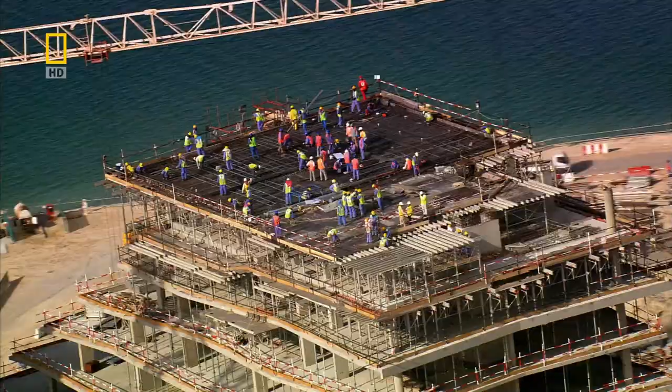Abu Dhabi, the richest city on the planet. It wants to join the City Super League and is undertaking an incredible transformation, building this extraordinary skyscraper, Aldar HQ. Nothing like it has ever been attempted. It'll be a race against the clock. Will this megastructure push even Abu Dhabi to the limit?

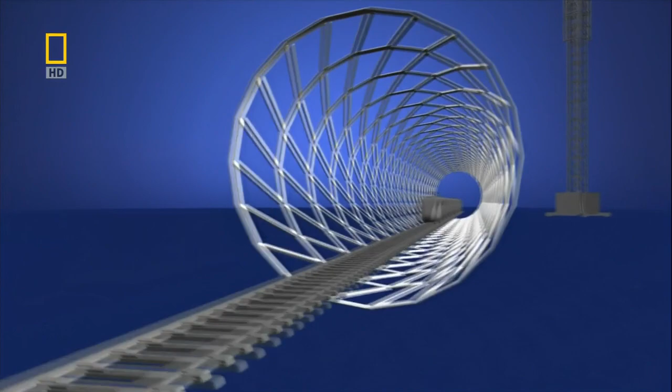Abu Dhabi is in the midst of a construction boom. It's the largest of 7 sheikhdoms known as the United Arab Emirates. Its capital, also called Abu Dhabi, is the richest city on earth. Its ruler, Sheikh Khalifa, has a cool $875 billion in the bank and an audacious spending strategy to match. He wants to transform the skyline and compete with the international elite of London, New York, and Hong Kong.

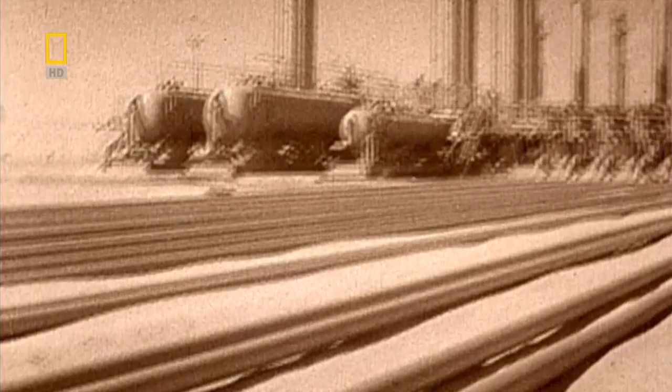But this is not the first time the Emirate has stood at the crossroads. Just decades ago, Abu Dhabi was a desert backwater, until the discovery of oil in 1958 brought unimaginable riches to its ruler, Sheikh Zayed. As the petrodollars flowed in, he converted the shell houses into high-rise, and the traditional way of life was swept away.

Today, Abu Dhabi is a thriving metropolis, sitting atop the world's 5th largest oil reserve. But black gold alone cannot put this city in the Super League. To do that, Sheikh Khalifa must lure big business and tourist dollars. Abu Dhabi must expand to thrive.

To put Abu Dhabi on the world map, fledgling property developers Aldar plan a whole new micro-city, Raha Beach. It's an ambitious proposal. At 11 kilometers long and almost a kilometer wide, this city on the sea will be the biggest project ever attempted in Abu Dhabi's history. Mohammed Al Mubarak is in charge of delivering this audacious development. The vision of their highnesses and the vision of Aldar was to create this almost mini city where people can live, study, play, and work in one destination.

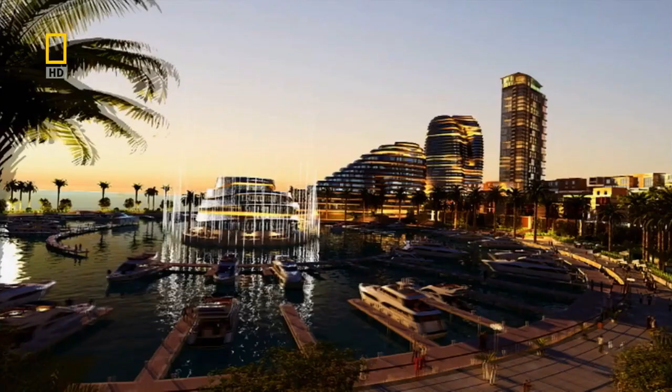Al Mubarak must attract investors if Al Raha Beach is to succeed. So to launch the project, he commissions a signature skyscraper. Creating an iconic structure on Raha Beach was of vast importance in basically putting Raha Beach on the world map. Al Mubarak sets Lebanese architect Marwan Zgheib the task of designing an icon that raises the stakes even higher. The building will become Aldar's headquarters in the heart of their colossal development.

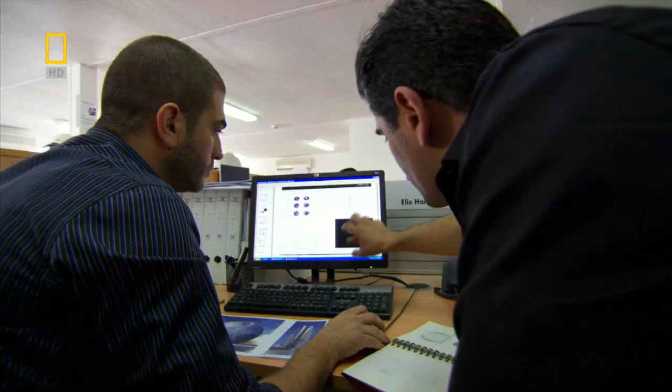But creating something new in a land where the iconic is the everyday won't be easy. Neighboring Emirate Dubai has taken center stage with a number of headline-hitting projects. The world's tallest skyscraper, Burj Khalifa, the Palm, and the World, and the emblematic Burj Al Arab. To stand out from the crowd, Zgheib knows he must redefine the extraordinary. Simple can be powerful sometimes, especially in architecture. You can see it since the pyramids of Egypt. Most of the iconic buildings are very simple buildings.

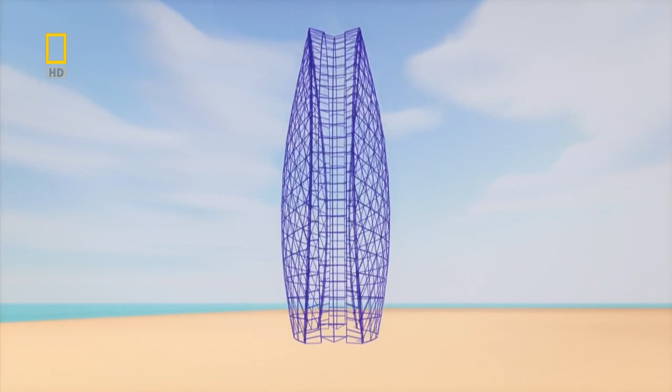But it isn't until Zgheib is relaxing on a plane that he has a brainwave. I couldn't sleep, so it was a moment of relaxation, you know. And then the idea came, simply. So I took a pen and I drew it on a sketchbook. The design is simple but daring. A round skyscraper taller than the Statue of Liberty, with a curved glass skin covering the area of 4 football fields. To be honest with you, the moment I imagined it, I knew it was a winning concept. I knew it was something different.

In fact, the design is so unusual, Al Mubarak initially doesn't know how to react. When I first looked at the MZ design, I was a bit confused in the beginning, to be honest with you. I felt like I was looking at a comic. I felt that this was a flying saucer and basically it landed on Raha Beach. And I just kept on staring at it for like another 15 minutes. And after 15 minutes, I just fell in love with it.

Zgheib's design is inspired by nature. 2 giant circular curved walls of glass mirror an open clamshell. Architecture is nothing but imitation of nature. At the beginning, the idea was so geometrical, very pure. It's like a seashell. The seashell has deep meaning for Abu Dhabi with its seafaring heritage.

But a circular design poses a problem. Just like a coin that stands on its edge, it risks being unstable. The circle must be balanced. So Zgheib turns to some very old-school geometry. The real challenge of the circular facade was to find the 2 points where the building should pose on the ground. And for that, I had to go back to one of the oldest rules in architecture, proportion. When you have a circle, you can divide it into a pentagram.

And that pentagram, in fact, is a representation of the cosmic body of the human being. So you can put a man in that pentagram, the man and the universe. So the pentagram will define the 2 points of the circle where the facade will lay on the ground. And this will create the perfect balance.

It was the same thinking that led 16th century philosopher Heinrich Agrippa to draw man as a pentagram inside a circle, and has helped architects to proportion buildings for centuries. But it's one thing to sketch a circular skyscraper and another to bring it to life. There is no precedent. A building like this has never been attempted before. Zgheib must find out if his design can actually be built.

We knew from the first moment that the engineering of that building is not going to be a simple traditional thing. But it's not the skyscraper itself that poses the first major challenge. It's the proposed site. They wanted to show me the site, but all you can see was the sea, nothing but the waters. Unbelievably, the solid ground required for Aldar HQ does not yet exist. The desired location is 700 meters out in the Persian Gulf and 8 meters underwater.

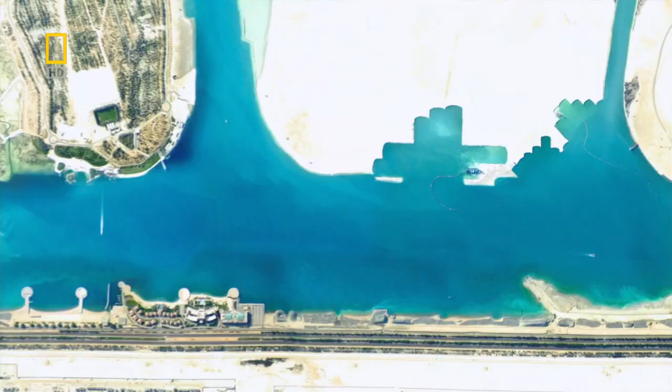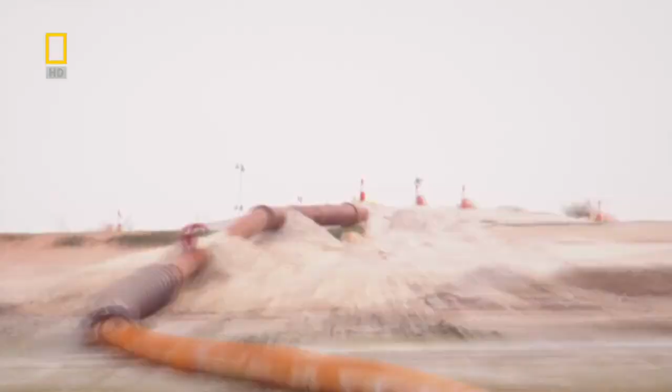These are no ordinary dredgers. It takes an enormous claw layered with 48 reinforced steel teeth to slice through the hardened sand. The sand is pumped through a floating pipe to the construction site. Here, excavators toil 24 hours a day to flatten the virgin ground. After 8 months, the land for Aldar HQ is fully formed, and with this, the first major problem overcome.

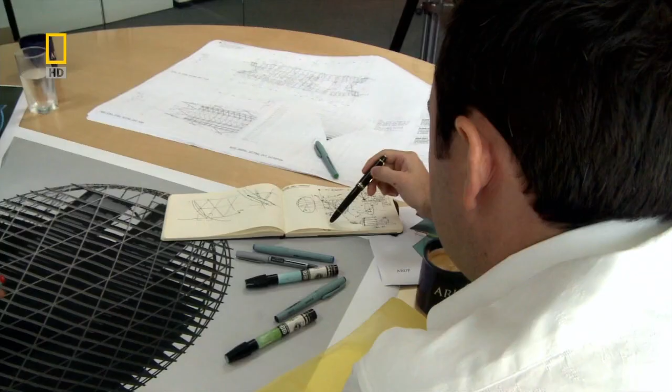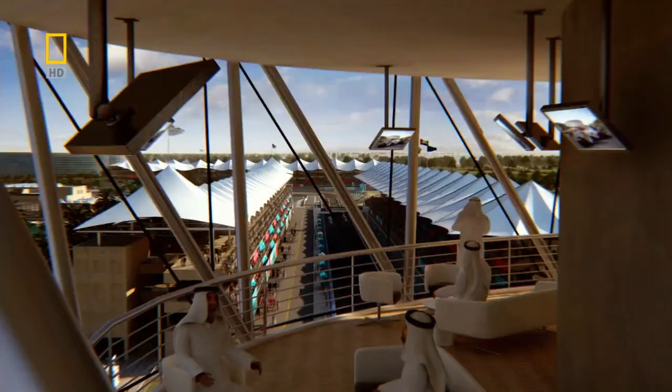Aldar want their skyscraper completed by an astonishing deadline. In just 30 months' time, the eyes of the world will be on Abu Dhabi when it hosts its first Formula One Grand Prix. The racetrack will be on its own designated island, complete with hotels and theme parks. And Aldar are building the lot. The international press and tens of thousands of visitors will descend on the city. It's the ideal opportunity for Aldar to showcase their new HQ. But to stand any chance of meeting this target, the team will have to pull out all the stops.

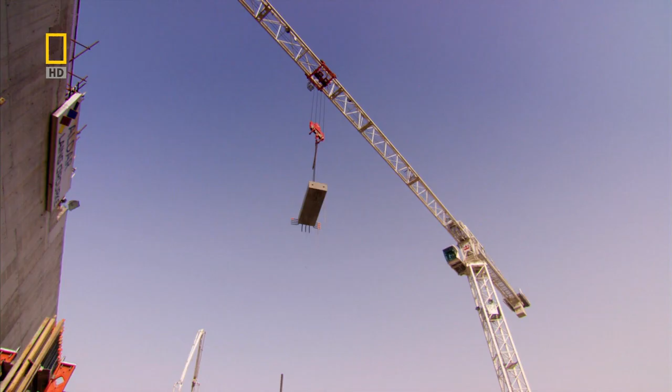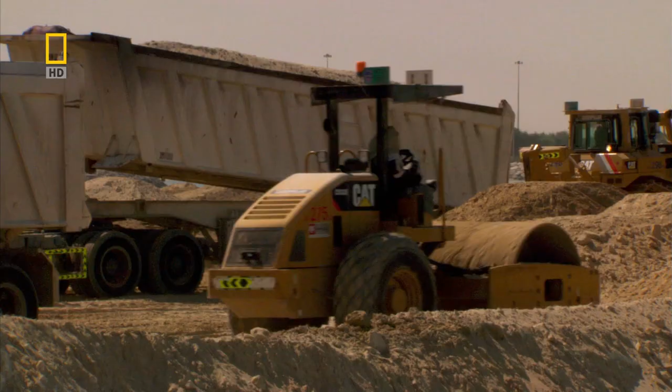Normally, blueprints are complete before construction begins. But Aldar HQ's deadline means this is impossible. Given the programme challenges with this project, the only solution was to overlap the design with the construction. It's the only way the team can design and build a radical skyscraper in just 30 months. With the clock ticking, the ground is prepared for the foundations. They will carry the loads of Aldar HQ into the ground.

But there's a problem. Working on blueprints one step ahead of construction could be risky. The speed at which the construction had to be undertaken meant we had to get the foundations in before we'd fully resolved what goes on above. Even though nothing like Aldar HQ has been built before, the engineers must take a leap of faith and start laying the foundations without a full set of plans. It put tremendous pressure on the team. Problems can't remain problems for long. We don't have the luxury of time to sit around and contemplate what the solutions might be.

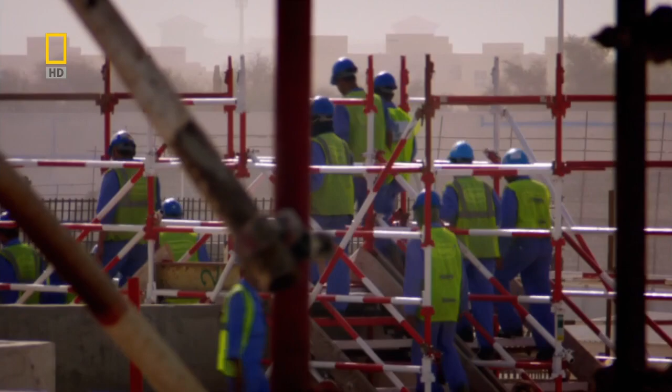Just 1 month after design has started on Abu Dhabi's round skyscraper, the construction team arrive on site to begin foundation works. For construction manager Miles O'Sullivan, the schedule is a shock. With the design not complete and being told you're going to pile in 1 month, almost crazy. But it's not just the first deadline O'Sullivan has to worry about. Aldar HQ's round curved shape presents an enormous sail-like area when wind strikes. Wind tunnel tests must be done to prove the foundations can take the strain. But the results won't be back until work has already started.

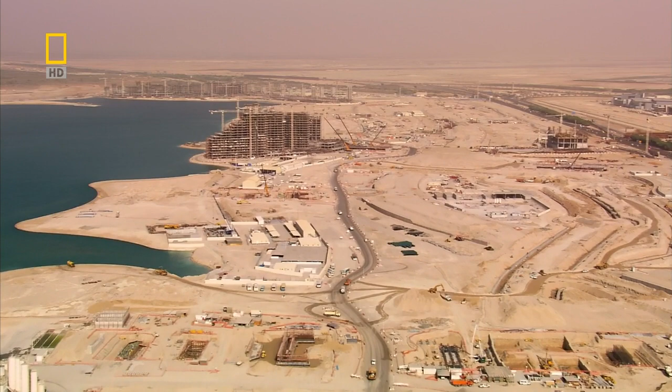Abu Dhabi is regularly hit by high-pressure winds that sweep in from the Persian Gulf. But building Aldar HQ so close to the sea will put the foundations under another kind of pressure. Digging for Aldar HQ is very similar to digging here in the sand. What you get as you dig down is you'll get to see the groundwater starting to surge through the sand. And in fact, it's that groundwater that we see start coming through the sand here that's creating the pressure and obviously creating the issues for us when we do the construction.

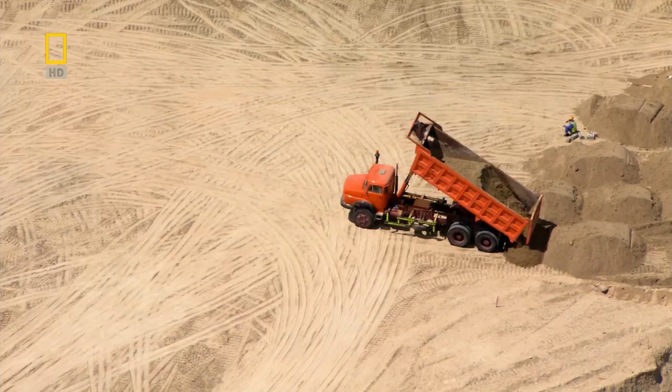The upward pressure of the water and the loose sand pose a problem for foundation construction. Before excavation can begin, the team must build a solid barrier called a diaphragm wall or D-wall. It's a concrete barricade formed of interlocking panels which socket into the bedrock and reach 16 meters below the surface. The D-wall holds back the loose sand and the surging seawater, ensuring the ground inside the barrier can be removed.

These areas here, what are these? The D-wall must be built before the foundations can be laid. But with the blueprint above ground a work in progress, the team can only hope that over-engineering the foundations will make them strong enough.

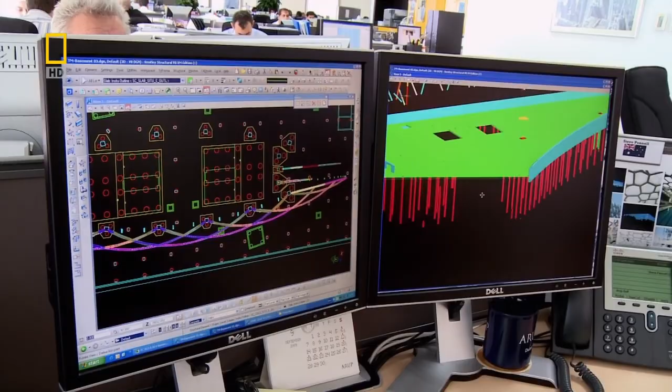The design calls for about 400 concrete piles that work in two ways. Half of the piles rely on friction with the ground to secure the structure to the rock and sand below, whilst the remaining piles drive deeper into the rock to dissipate the building's immense loads into the ground. On site, D-wall construction begins. It's the same process ongoing at this Abu Dhabi construction site.

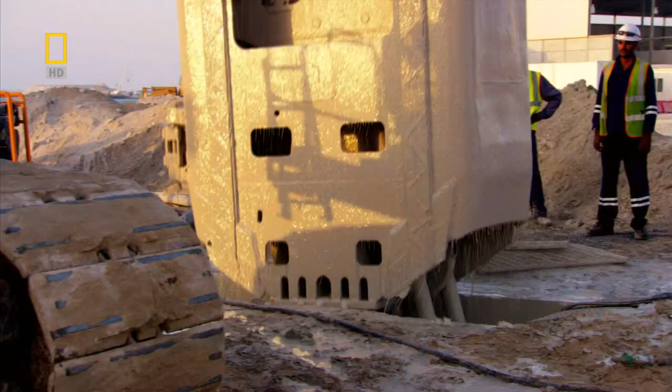Until recently, Raha Beach was just a vision for Aldar's Mohammed Al-Mubarak, but the dream is slowly emerging from the sea. Seeing that land come up, seeing the amount of work and the amount of staff we had on the ground to make sure that was going to be done, that was like watching Rome being built.

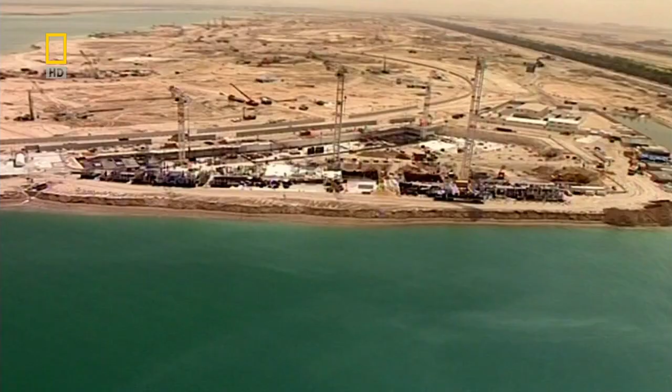The D-wall and concrete piles create a firm foundation upon which to build Aldar HQ. But the force of the sea pushing up through the sand still poses a threat to the skyscraper. A great way of demonstrating the problems we faced at Aldar HQ with the groundwater is in imagining that this bottle here is Aldar HQ. And as I push the bottle down, you see forces are exerted on my hand. And in fact, that's the groundwater trying to push the building out, trying to push Aldar HQ out of the building site.

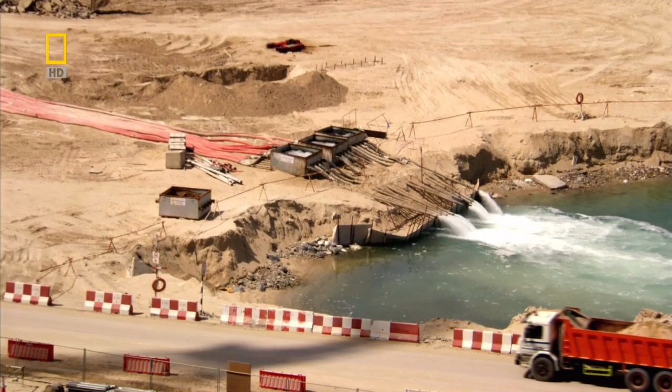To keep the site dry during construction, water is sucked out of the sand and pumped out to sea. But that's only a short-term solution. To protect this skyscraper in the long term, the team need an extra defense. It's a giant slab of concrete called a raft. It creates a barrier against surging water, stops the piles from punching up through the building, and acts like a snowshoe to evenly distribute Aldar HQ's 59,000-ton weight into the ground.

Raft construction for Aldar HQ is 12,000 cubic metres of concrete, which is a 30,000-ton structure. It's a huge element. With 2,000 truckloads of concrete to pour, it's a job that continues into the night.

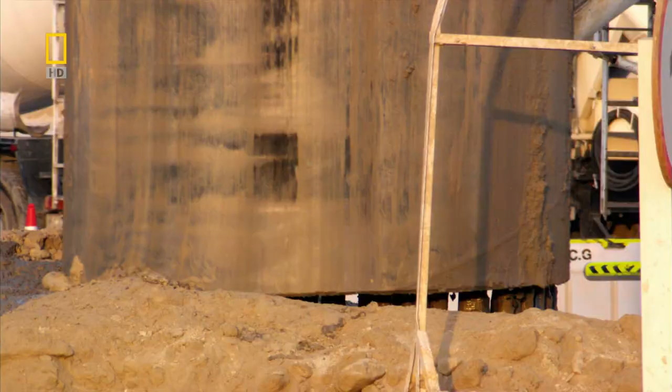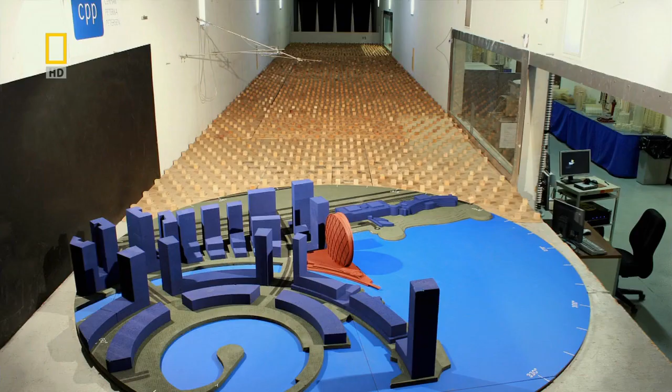But engineers are just getting to grips with the severe forces that will affect the piles. The unique shape of the skyscraper will capture wind like the sail of a yacht. There are no guarantees the foundations will be strong enough to cope with the loads. The advanced construction works had to commence so quickly that we didn't have time to do the wind tunnel test. It was important that we did one, primarily because this is a unique shaped building. Gibbons calls upon wind engineer Roy Denoon in Colorado, USA. He puts a scale model of the HQ through its paces in his high-tech wind tunnel.

Right at the start, Craig Gibbons actually called me and said, "We've got something really unusual coming up. Can you take a look at it and give us your first best guess of what the wind loads might be? Give us some guidance on how to get to some loads for the foundations, because this is running on such a fast-track schedule." Knowing that Gibbons is already building the foundations, Denoon wastes no time in firing up the fans. If the tests reveal the wind loads are higher than predicted, the foundations already in the ground may have to be redesigned. To be putting in the foundations before we could finish the wind tunnel testing, that always gives us a little bit of cause for concern.

Denoon is right to be worried. He knows how high-altitude wind impacts on very tall rectangular skyscrapers. But Aldar HQ's lower height means another type of wind is the threat. When we look at the really extreme wind speeds in the Middle East and in this region, we find that the highest, what we call gust wind speeds, the short events, are caused by thunderstorms. Abu Dhabi may appear sun-soaked, but during the spring, the intense sun heats the moist air, causing spectacular thunderstorms. Wind speeds can escalate up to 137 kilometers per hour. The key issue with thunderstorms in this region is that they give the absolute highest gust wind speeds.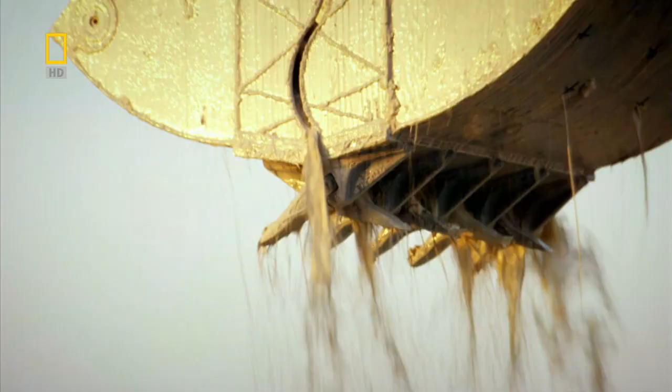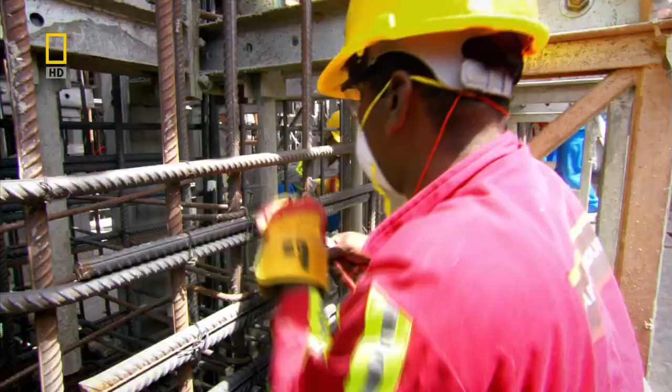Now the structure needs a super strong backbone or core. But again, conventional building won't fly with this design. For Aldar HQ, one core wasn't enough. We needed two cores, in fact, to take all the loads down into the structure. Aldar HQ needs two concrete cores for extra stability. The twin spines rise a full 125 meters from the concrete slab to level 23. Reinforced with 6,500 tons of steel, these cores will transfer the loads into the piles. But to channel these forces safely, the concrete must be cast without any flaws.

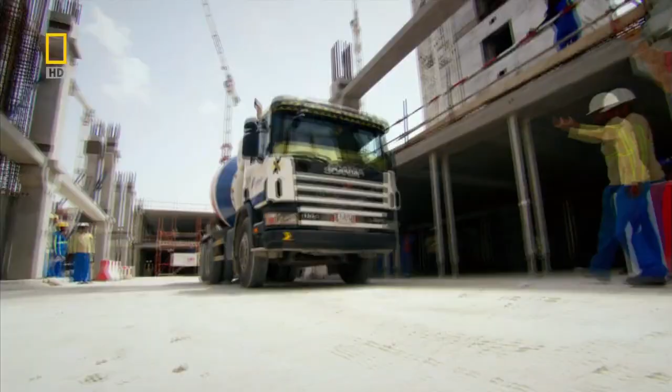They need a way to build the cores as two single pieces of concrete. The answer? To slip form. It's a clever way to build big concrete towers. Liquid concrete is poured into a giant mold, which forms the shape of the structure. The mold slowly climbs up the core as it's cast, forming a single concrete tower without any joins. Seamless concrete will ensure the HQ's cores are strong. But these 125-meter backbones must be built in only 6 months.

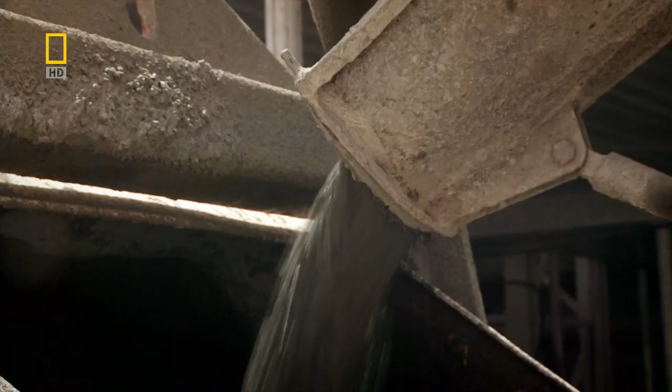It's the same process ongoing at this Abu Dhabi construction site, led by the Aldar HQ team. We are calculating how much per hour we need to climb, and then how much concrete we need to place in every hour. Slip form is fast, but on this schedule it's not fast enough. O'Sullivan has a trick up his sleeve to speed up construction. We set a challenge to both cores, who could get up there first. More, get up. The teams battle to reach each level before the other.

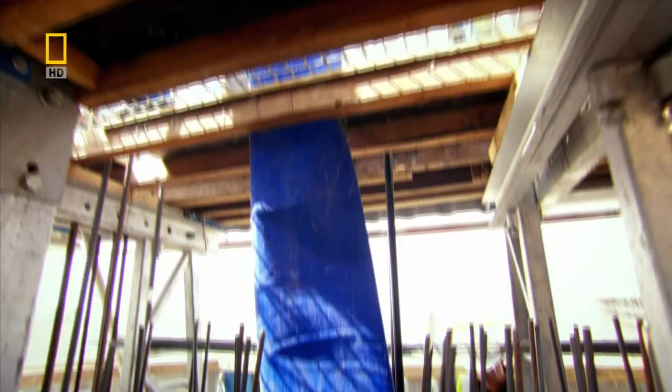The cores grow meter by meter under a constant cycle. The concrete is released and poured around the steel reinforcement. Hydraulics anchored to the structure raise the mold or shutter so that the next layer of concrete can be poured. And manpower is a key focus because slip forms are very labour intensive. You need to make sure that the guys are on deck, they're there at the right time, they're doing the right works. 4 months into core construction, the two teams are neck and neck in the race to the top.

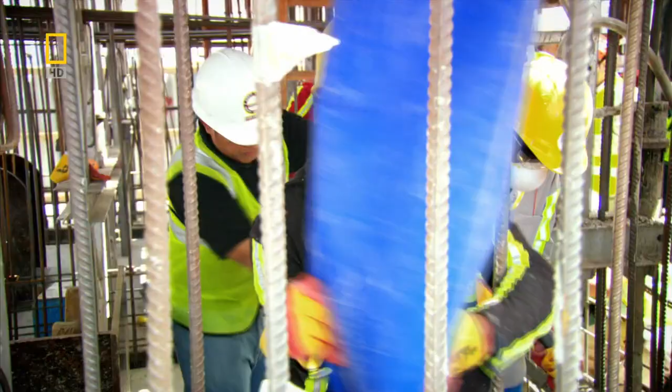Core 1's team leader keeps a close eye on Core 2's height. It's been my benchmark, so if I'm doing better, I'll be ahead of them. A lot of pressures are there. My boss is telling me, do this, go up, go up, go up. But it's good, the pressure is good. Core 2's leader also feels the strain. I'm working 24 hours today. I try to finish earlier than the other core.

Every month, the builders pour enough concrete to fill 1.5 Olympic swimming pools. But the teams aren't home and dry yet. It's still a challenge to finish. Cores are renowned for going up quickly and sometimes having problems, so there's a lot of coordination effort that goes in to make sure that they do go up on time. We had structural steel elements to cast in. We had crane connections to get right.

After just 6 months, the 2 cores are approaching the top. Core 2 is only a metre or so behind, but Core 1 push ahead to victory. Core 1 won the race. It's really good to know that we're on top. For O'Sullivan, the contest to build the cores in record time has paid off. A lot of planning goes into the cores. To see it come off, a fantastic feeling. But it's only a stepping stone, the core construction. There's a lot more to go on.

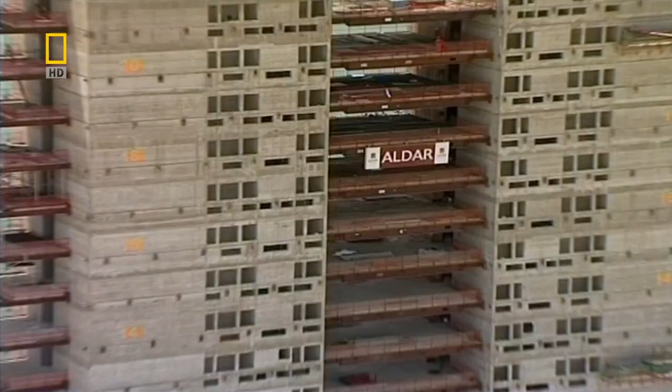The team have so far overcome the obstacles to bring Aldar HQ to life. But now they must face their most complex challenge to date. 1 year in, and Abu Dhabi's radical skyscraper is beginning to take shape. But with only 19 months to the deadline, the engineers must crack how to build Aldar HQ's vast external shell.

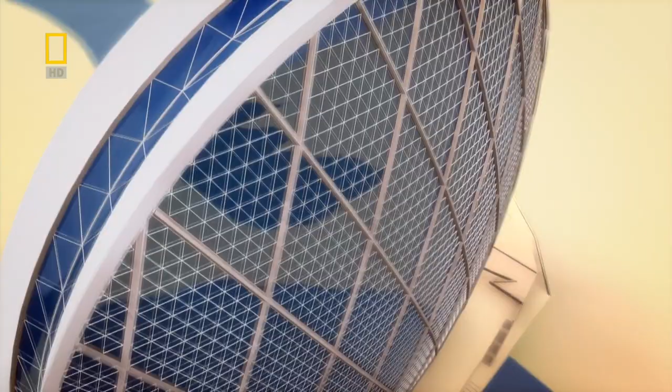The design demands a heavyweight shell to support its wide girth and survive huge wind loads. But the architect stipulates open office space, floor-to-ceiling windows, and panoramic views of the Persian Gulf. In the United Arab Emirates, the shells of rectangular skyscrapers are built with concrete.

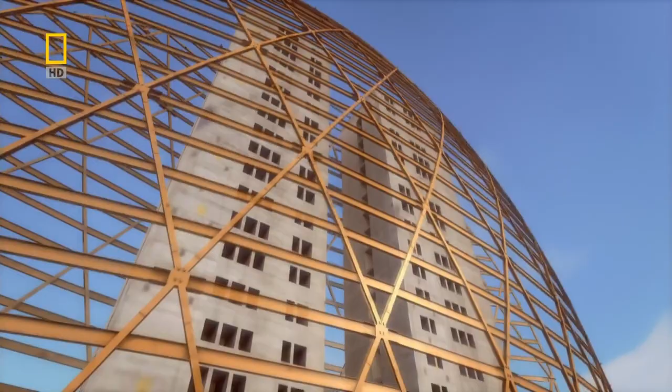The answer? A specialized steel exoskeleton called a diagrid. It's a muscular but slender steel frame that will form the HQ's unique shape and will channel forces through its high-strength beams and joints into the cores. Steel is very strong as a single element, but meshing them all together gives us this added strength and also allows us to make these rather unusual shapes.

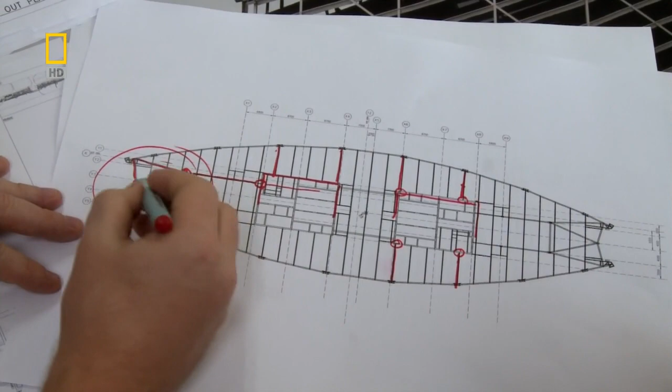The geometry of the building presented a significant challenge to us, but the other challenge was that a diagrid building, or buildings using this diagrid system, had never been built before in Abu Dhabi and the UAE. Let's have a look at it if you wouldn't mind. It'll take expert steel fabricators to pull this job off. When we first saw the design, it was something that we knew we had to put our most experienced guys on. The structure's very, very complex.

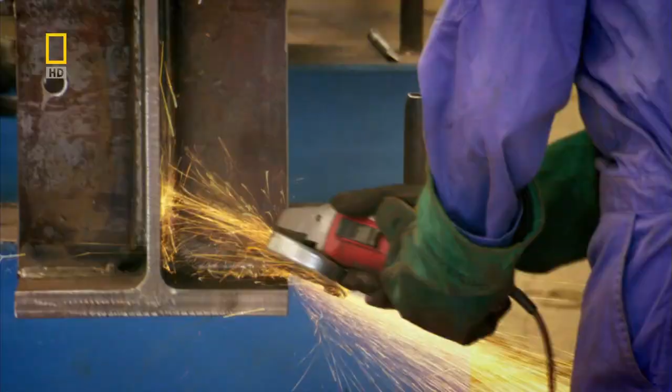The army of fabricators work in shifts around the clock to cut and weld 2,500 tons of steel. The factory is building a series of A-shaped steel sections, weighing up to 30 tons each. They will connect together to form the structure's signature curves. But if manufacturing these giant A-frames is not a big enough job, lifting them into position on site will be a major challenge.

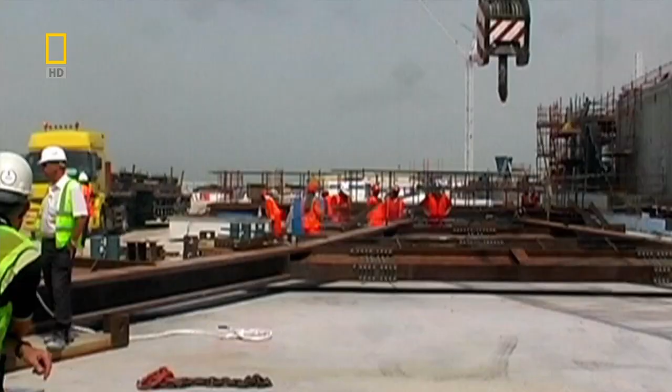Great to see the steel arrive for the main diagrids, the main columns to the structure. Huge sections. The thought of actually starting the steelwork some 18 months after we started the job, fantastic. But excitement of the first A-frame delivery is soon replaced with trepidation. Lifting these monsters will be a precision job, and tensions run high.

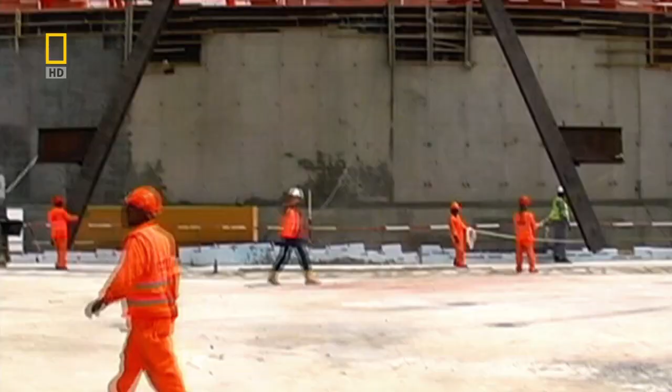When we rigged the first A-frame up, you've got to put all the chains on it. It would take maybe an hour to rig it up, and everybody's then thinking, I hope this is going to work. Everyone is on tenterhooks. Now is the moment of truth. The A-frame is lifted off the ground. There was a big ah from the crowd when it went in. The first exoskeleton section is finally bolted to the base plate.

To see one go in, an amazing feeling. First A-frame up, again a milestone achieved, but then a lot more to go. Another 99 A-frames must be fitted to form Abu Dhabi's unique skyscraper. The handover date is now just 19 months away. So the team must now focus on the HQ's interior.

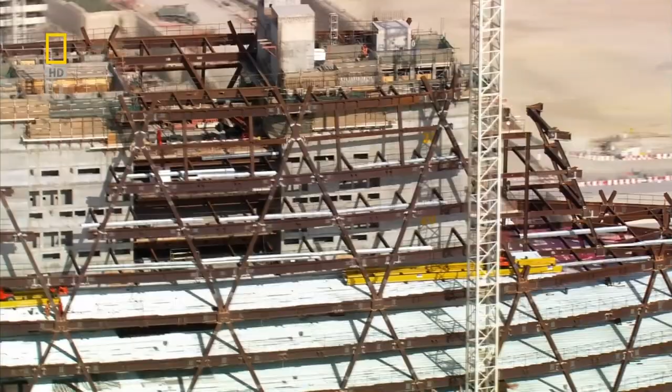The structure needs an alarming number of restrooms, 85 in total. This is no weekend DIY job. It'd take an army of plumbers and time the schedule cannot spare. So to fast-track the task, the team innovate again with prefabricated washroom modules or pods. A pod is a factory-made restroom, complete with lavatories, basins and mirrors, ready to plug into the building.

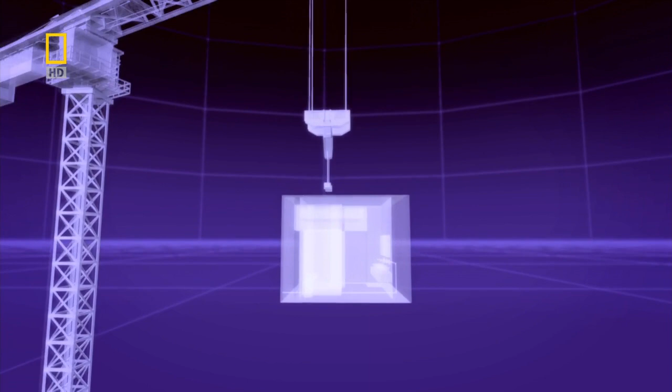The team plan to lift these 12-ton pods by crane and lower them into the cores like a giant game of Tetris. Construction is a finely tuned sequence. The pods have to be in before the exoskeleton blocks access to the cores. Aldar must approve the design fast, but there's a problem.

We produced a lot of visuals and graphics which we had signed off. Then we actually built the pod. We went to look at it at the factory and a lot of people thought that's it. But Aldar unexpectedly rejects the pod design. It's just too ordinary for such a futuristic skyscraper.

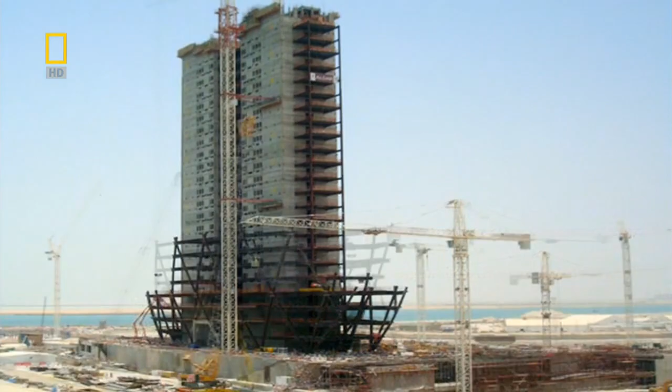It will take months to remodel, and the exoskeleton can't wait. The whole plan could go down the pan. The only option is to leave out 2 roof sections and drop in the pods later, but this has its own dangers.

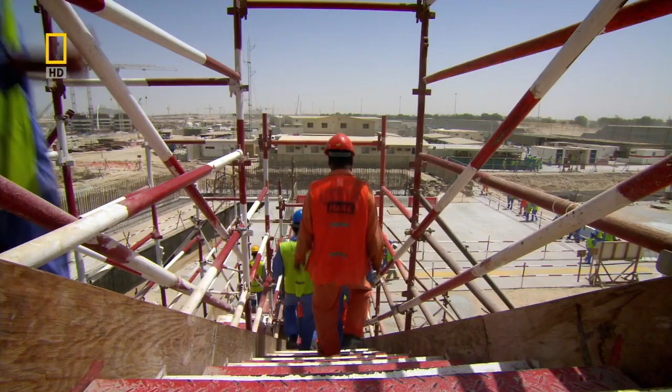With zero hour looming, the team must now wrap the building's skeleton with a glass skin. And no one has ever built a glass facade like it. The geometry of Aldar HQ is highly complex. Two giant bowed facades cover an area the size of 52 basketball courts. A third narrow surface joins the round facades like a zipper, arcing an extreme 290 degrees from one side to the other.

But curved glass like this doesn't exist. The engineers need another plan. The secret to covering a curved surface with flat glass is its shape. Square glass isn't an option. Squares can only bend in one direction at a time without distorting. Aldar HQ needs triangles. They can pivot on 3 axes and seamlessly join with their neighbors. To form these complex curves, it'll take 25,000 individual panes.

But before glass production can begin, the team must know what wind pressures it will face. It's back to wind engineer Roy Denoon, who must test the design in his wind tunnel. When we first saw the design, we knew there was some potential for some quite high glass design pressures. If you underdesign a pane of glass, then it will be sucked out the building. The large facades are most likely to cause trouble.

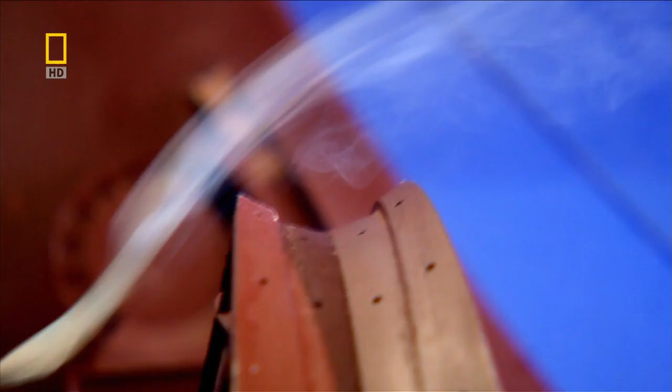But that's not all Denoon's test reveals. The circular shape of Aldar HQ creates another problem. When we initially saw the design, the sharp edges threw up the warning flag that said, look, we can get some pretty large pressures here. Where the wind hits the edge of the narrow strip of glass, it spirals in on itself, creating a vortex.

You see this recirculation of the flow. It separates away, and you get this little bubble on the surface where the wind isn't hitting, and then it comes back in to meet the surface again. That's typically an indication that that's where your highest design loads are occurring for your glass. And a very, very strong suction force is what that little bubble means. To stop wind sucking glass out of the HQ, each pane must be beefed up with thicker glass and a stronger frame.

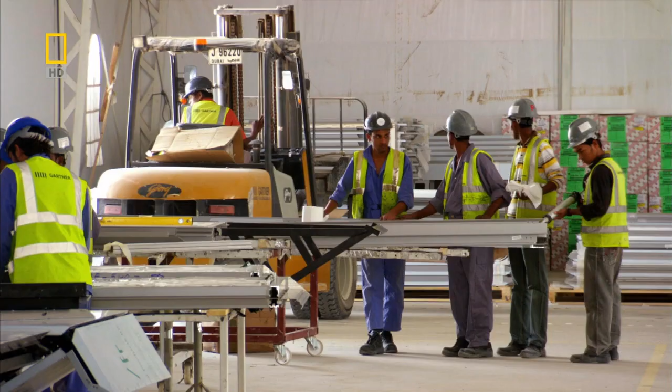But that does nothing to limit the scale of the job ahead. Installation. You talk about 25,000 pieces of glass to do that for the building in 10 months. It's a monumental effort. It's a constant battle, making sure that you get the glass to site. But having the glass factory on site is a lifesaver. It made it easier for the site to actually call up on glass. Once they were installing the panels and ran out of glass, we were immediately on the phone. Hey, we need more panels over there, so we got them on a truck, and 5–10 minutes later they were on the site.

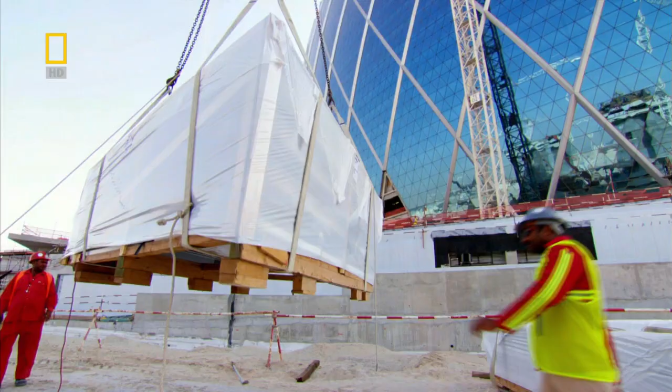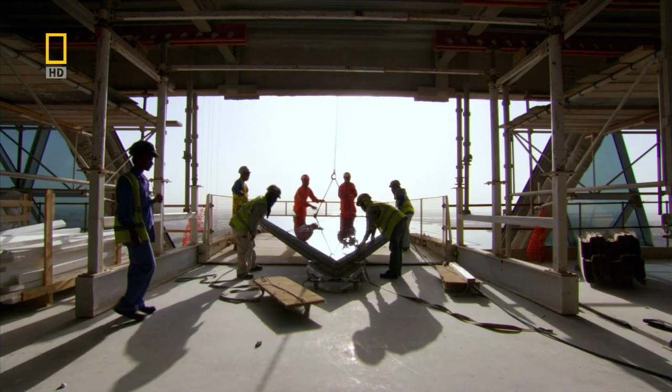The glass factory sends the panels to the site by truck, and the panels are lifted by crane up to the installation team. The constant pressure was the program. The glass is pulled onto the floor plate, but it takes a team of 8 specialist riggers to install the panels. Probably the hardest thing was the sheer volume that had to be installed. Fixing glass on a curve at this height means the panels have to be swung out from a platform that hangs out of the building.

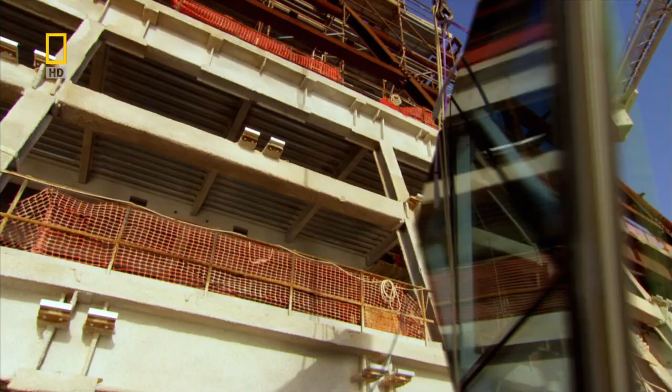It should be easy, but then this team have Abu Dhabi's wind to contend with. The wind here can just blow in from nowhere. It caused us no end of problems. The glass would start to revolve and spin. We would get a choice whether to lift it, bring it into the building, put it down, or to put it straight back down on the ground. They were decisions that had to be made on the spot. And you don't want a large panel coming down from 20 stories. Just contemplating that, it doesn't bear thinking about.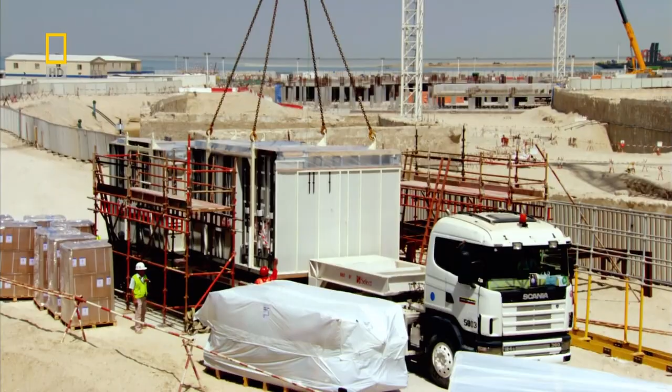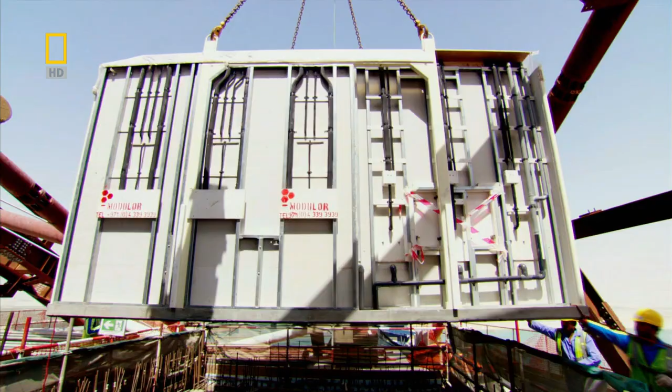The pod drops are quite quick. We hook them up, we take them up the 140 metres to the top of the tower crane. The pod can now be lowered into the core shaft. It's a tight fit with just 75 millimetres of clearance. When I saw the first pods in, it was a relief that that saga was over and we'd actually managed to achieve what the client wants.

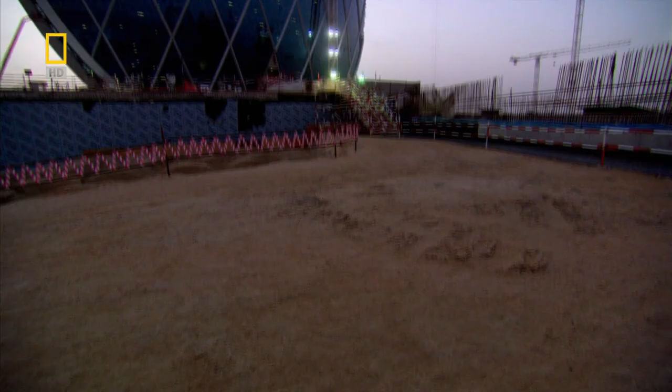The pods are on the move, but the long delay has serious consequences. Finishing the exoskeleton should be a straightforward task. But the incomplete steel roof has sagged out of shape. Eight months from the deadline, and the world's first spherical skyscraper is fast approaching completion. But with the end in sight, construction hits a serious snag. The delay in fitting the washrooms into the cores has forced the team to leave the roof arch open, causing the steel to slouch out of shape.

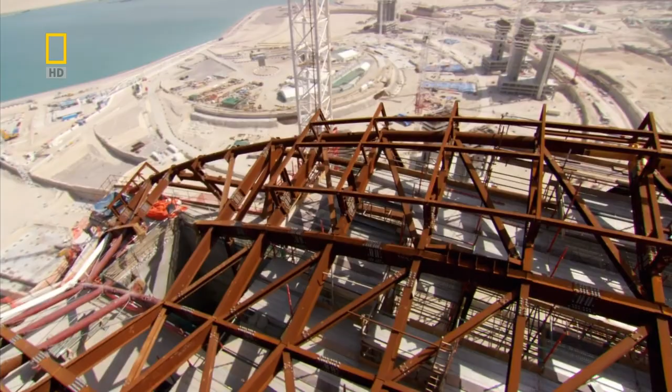The arch of the HQ's lightweight roof is the key to its strength. Its curves evenly distribute the forces down into the foundations. But if any elements of the arch are missing, the forces cannot flow away. The roof will sag under the weight.

To discover how serious the slump is, the steel is surveyed. I made a phone call to our site supervisor, Bob, and asked the question of what the actual sag was recorded, expecting it to be around about 50, 60 mil. When we got the figures of 150 millimeters, I was a little bit shocked.

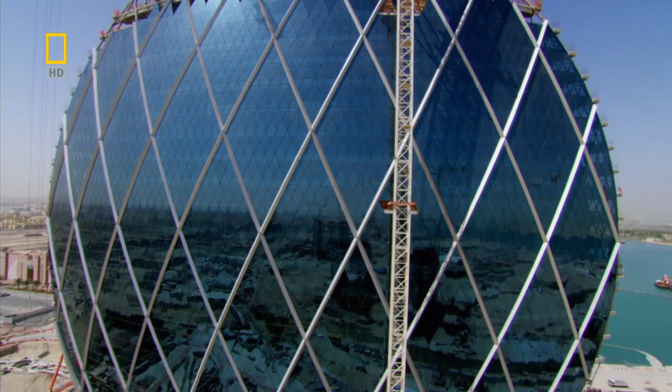With a building that relies on precision engineering, a 150 millimeter sag is a huge problem. The roof will not slot together. The brackets to connect the remaining 40 glass panels will be out of alignment. There is no time to redesign. The team have to somehow make the roof steel fit together. The only way is to lift the entire roof into position, and it weighs a staggering 200 tons.

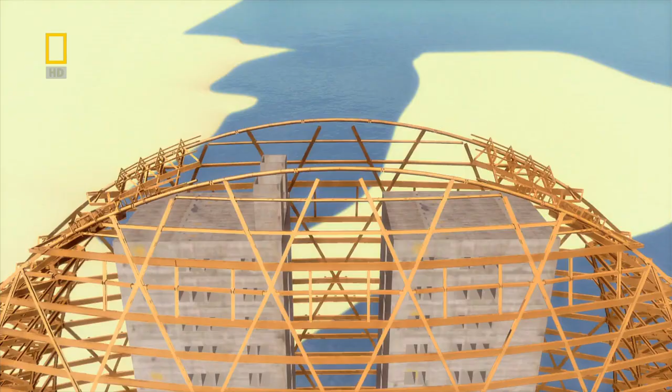Even for experienced steel engineer Bob McPhee, this is a serious undertaking. I hate it when you start waking up thinking about your work. I've never liked to do that. To lift the roof arch, 2 hydraulic jacks are positioned on top of a load-bearing wall, carrying 80 tons of weight into the core.

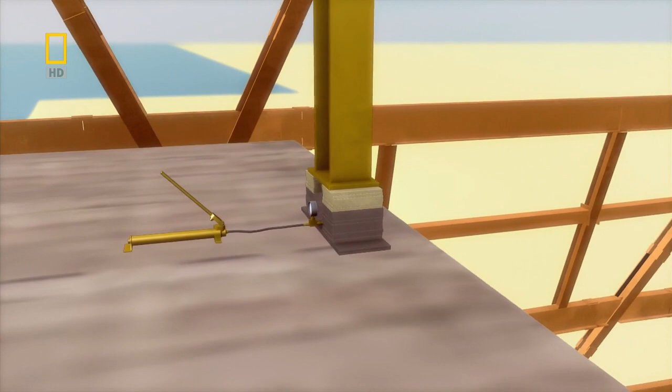2 more jacks are propped with 16-meter-tall steel columns and channel 40 tons each into the concrete floor of level 23. The props are packed with steel slabs to hold the roof in position as the jacks are raised. The roof was moving firstly a couple of millimeters, then 5, then 10, then gradually into its position, 20, 50, 100, and then into its final position, 150 millimeters.

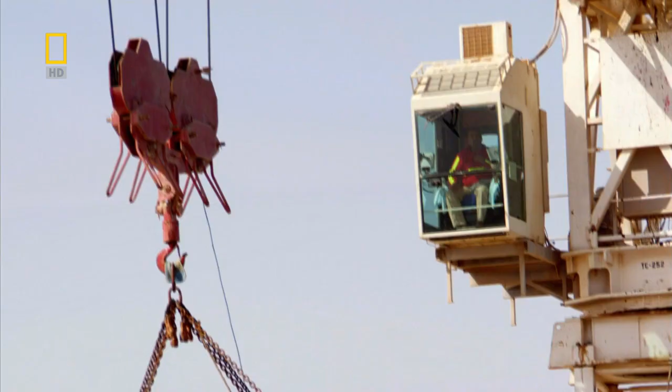The entire roof is raised by a whopping 150 millimeters. The slumped arch is finally in the right position. All that remains is to lift the last steel section. It's a tight fit. With a millimeter to spare, the roof is finally complete.

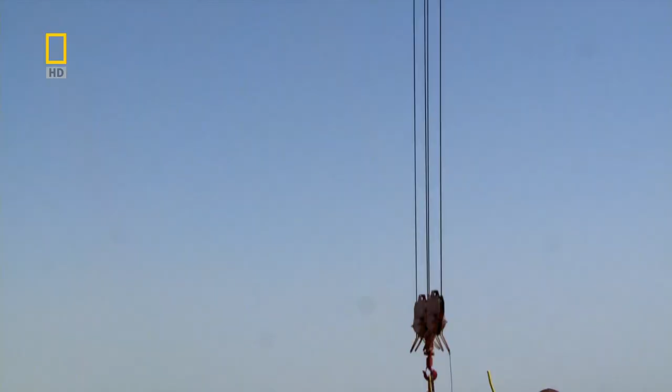With just weeks to spare before Abu Dhabi's first Formula One motor racing spectacle hits town, all of Aldar HQ's 25,000 glass triangles are in position, except one. The glass installation team lower the pane inch by inch. No one wants to be responsible for shattering the last sheet of glass. It's a defining moment for the team. Finally, the last pane slots into place.

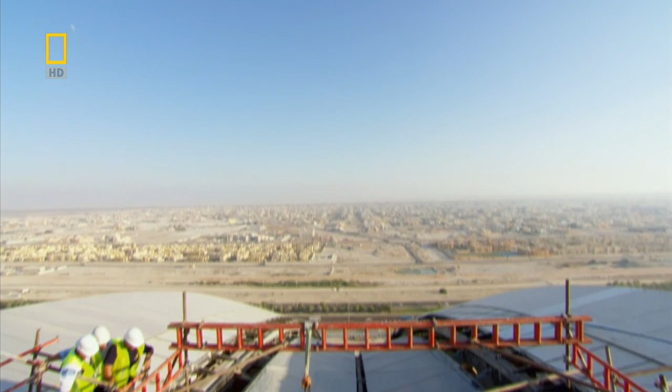Ecstatic. And actually see the last bit of glass go in. Amazing feeling. Hopefully the guys here feel the same way, and I'm just overjoyed. Against all the odds, and in just 30 months, the team have fulfilled their brief. An engineering triumph. This is Aldar HQ. This spherical skyscraper, a world first, rises 110 meters above the Abu Dhabi sands.

All stunning 25,000 glass panels mirror the surrounding landscape, reflecting the blue skies and the rolling sea of the Persian Gulf. Amazing structure. You don't see any circles in the world being constructed, so to be part of that was fantastic. Mindful of all the issues and challenges and highs and lows in between adds to that feeling of triumph.

Mohammed Al-Mubarak fell in love with an extraordinary idea. But will the building match his high expectations? It's really a work of art. It's a stunning building. To me, it feels like it should be in a museum. The space is unbelievable. It's really a colossal building. When you come up front to it, it's even bigger than you even imagined. And for it to come from paper to that, it's great.

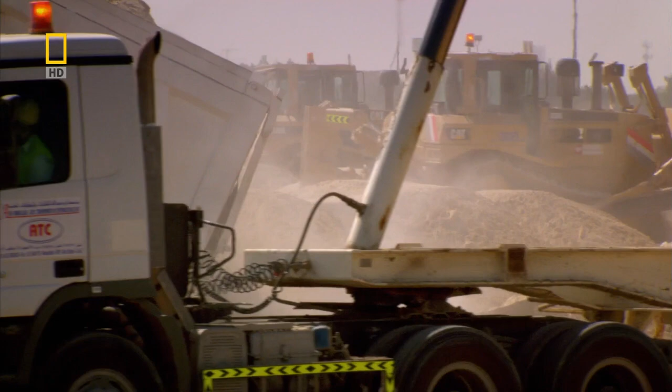Already an icon on the Abu Dhabi skyline, Aldar HQ should lay solid foundations for the future of Al Raha Beach. Architect Marwan Zgheib is delighted to see his concept sketch come to life. The building is more beautiful than the original idea because it's real now. It's no longer a simple concept.

It's become reality. Aldar HQ is a structure that rivals not just Dubai's iconic buildings, but can stand proud on the international stage. The HQ building has really put Abu Dhabi on the world map. If you ask me today, we're not yet into the world of Singapore or New York or Paris or London. Will we get there? I absolutely believe we will.